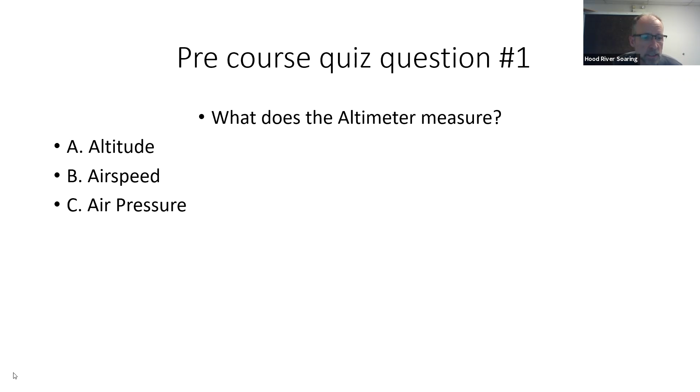Let's see, the next one is: which statement is true? I'll go ahead and activate that question. So you should see pre-test question 2 pop up on your Slido app now, and you can select A, B, or C. Which statement is true? This is regarding the atmosphere. A: Pressure increases with altitude and temperature decreases. B: Pressure and temperature both increase with altitude. Or C: Pressure and temperature both decrease with altitude. So as you are increasing in altitude, what is the pressure and temperature relationship, and how does that follow as you are increasing your altitude?

Looks like we've got 4 answers so far, and everybody's answered C, which is good. That's good. I don't know if we're going to get the fifth one in yet, but that's good.

So yes, pressure and temperature both decrease with altitude. If you think about when you went up on the jet up to 30,000 feet, it's really cold out there. Obviously you see that, and the only clouds or only moisture out there is frozen. And then the pressure also decreases, and we'll go into that, and I'll tell you why that's true.

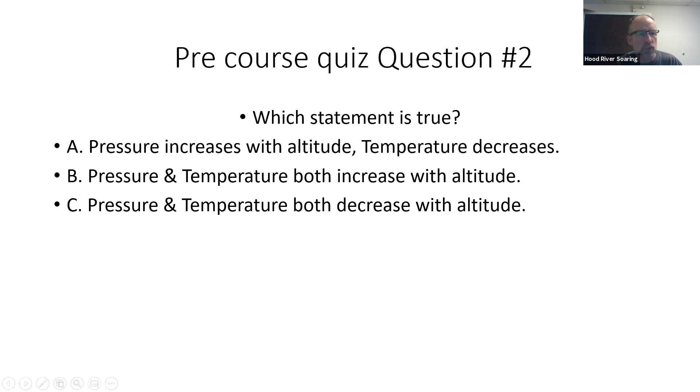Illustrate that as well. All right, so this is where I identify what the pressure instruments are. There are typically 3 pressure instruments in a glider or an airplane. They all have altimeters, and the altimeter gives you altitude. Remember, it's measuring pressure, but from that pressure it's giving you an altitude value, and it tells you how high we are. We want to reference the altimeter to know how high we are. It's especially important in a glider to know how high you are, because that's the only energy that you really have in a glider. You don't have an engine to go higher. The only way that you have energy to go anywhere is with that altitude. And to determine how far you can go, you need to know what the altitude is.

That's fuel in the tank in a glider is altitude. Next up on pressure instruments is the Airspeed Indicator, which tells us how fast we are going. We'll go into a little more depth on that, but they are important. Notice the altimeter is important because it tells us how far we can go within a glider, and also whether we can clear any terrain that we need to. But the airspeed indicator is important to know how fast you're going, because you need to have your airspeed.

Anybody who's flown already knows how important it is to have your approach speed correct. If you're flying too fast, you're going to float and use a lot more runway. If you're going too slow, the glider could stall. Very, very important instrument - in many gliders, that is a no-go item. If the airspeed indicator does not work, you cannot fly it. You can fly without an altimeter, but very seldom will you have an aircraft like this that you can fly without an operational airspeed indicator.

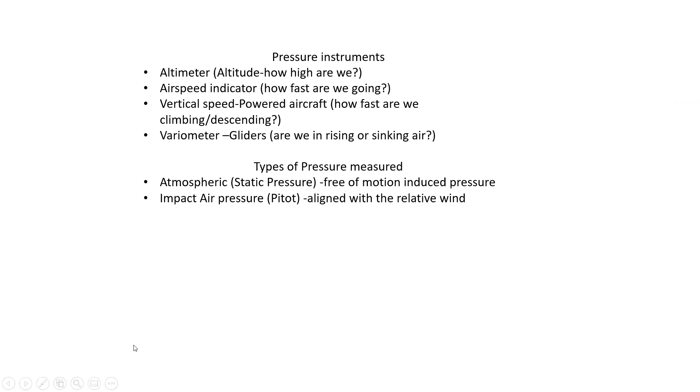Is atmospheric pressure the same as barometric pressure? Yes, that's pretty much true. I think we look at it as atmospheric pressure in an aircraft because you're moving through the air mass, whereas typically barometric pressure is what most of us on the ground think about, the barometric pressure at this point on the ground. But yes, it is the same thing.

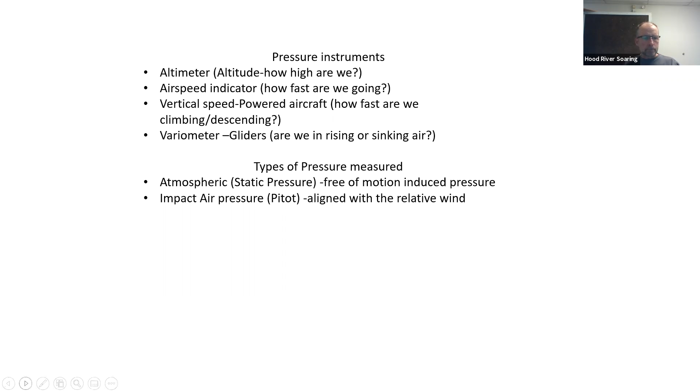This is a diagram of a typical pressure instrument system with the basic instruments: the altimeter, and the vertical speed or variometer, which references static air pressure outside the glider in a different way than the airspeed sensor does, but still references static air pressure. If you look over here on the side, these are the static ports. It shows two here; there aren't always two on an aircraft, sometimes only one, but often there are two. The altimeter, the vertical speed, and the airspeed indicator all reference static pressure. They all need that static pressure to work properly.

Now, the airspeed indicator also requires a second input, the pressure system from the pitot tube. The pitot tube faces forward. If you look at the K-21, I think pretty much everybody has flown so far. At the very nose there's that tube sticking forward, that's the pitot tube, and that's where it collects incoming pressure to determine airspeed. The thing to remember for questions is that if something happens with the static system, it affects all of these instruments, but if something happens with the pitot tube, it only affects the airspeed indicator.

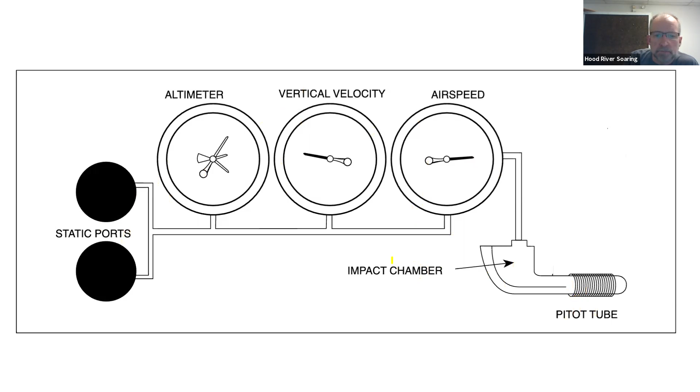We'll skip forward here, next frame. All right, so this illustrates the atmosphere. Down here at the bottom would be the ground, sea level, and all the way up top is 164,000 feet, that's rarefied air, way up in the atmosphere. One thing we as humans don't think of is that air has weight or mass, since we were born and live most of our lives near sea level. When we think of air, we think of nothing, but that is not true.

Air weighs 0.08 pounds per cubic foot. So in a normal bedroom, there's 50 pounds of air. You don't know it, you don't feel it, because we're used to it, much like a fish at the bottom of the ocean doesn't probably perceive that the water exists, it's always been there. You can't see it, but it's certainly there.

Now, where air pressure and the mass of the air becomes evident to us is when there's motion or movement involved. Like if you're going down the road and you roll down the window in the car and stick your hand out, now you're feeling the mass, you're feeling that air. So now we can feel it, still can't see it, but we can feel it. It's the same thing when the wind's blowing, the mass of the atmosphere becomes evident. Any questions so far?

So what we see is that the atmosphere goes all the way up to some 164,000 feet. At some point you're going to be into space, but the weight of the atmosphere is much more. That barometric pressure, atmospheric pressure, is highest down here because we have all of this mass of air, this column of air weighing down on us. That's why the pressure is highest here.

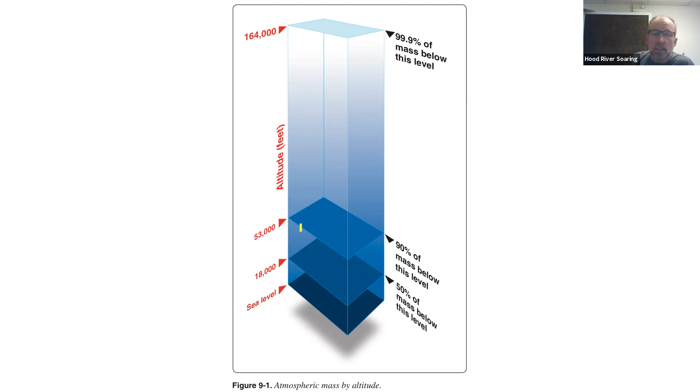Now, as we move up through the atmosphere, you can see that there's less air mass. There are fewer air molecules above us, so that weight is less, that pressure is less. And as we go further up, less pressure. So that's the principle the altimeter works on: sensing the difference in air pressure and inferring from that pressure, or lack of pressure, as you go up, what altitude you are at. Is that clear for everybody?

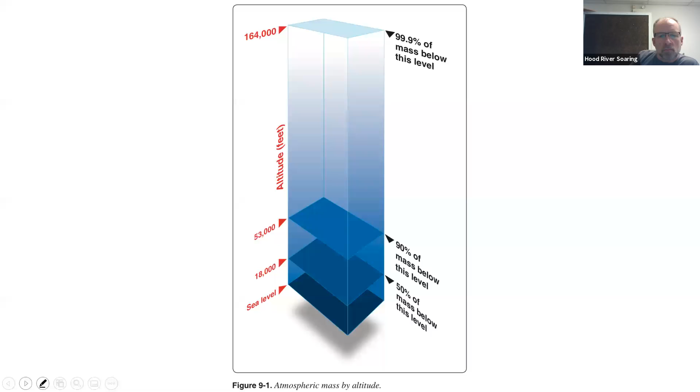Any questions about that? Okay, next up, next question, next one. Okay, so here we go.

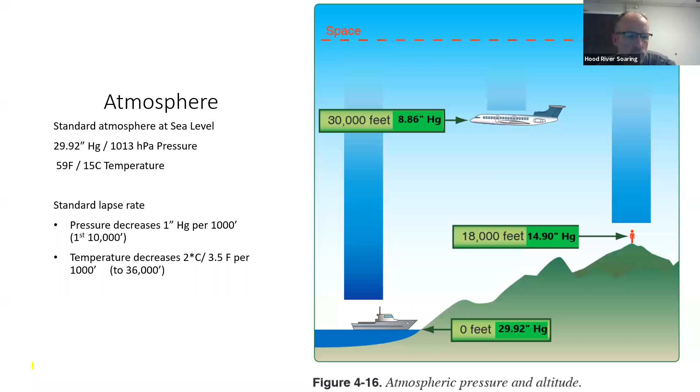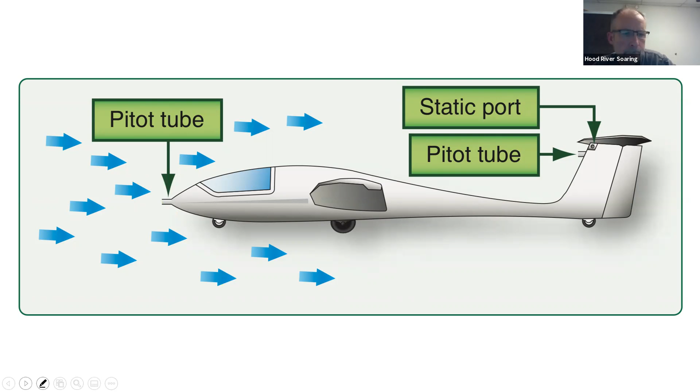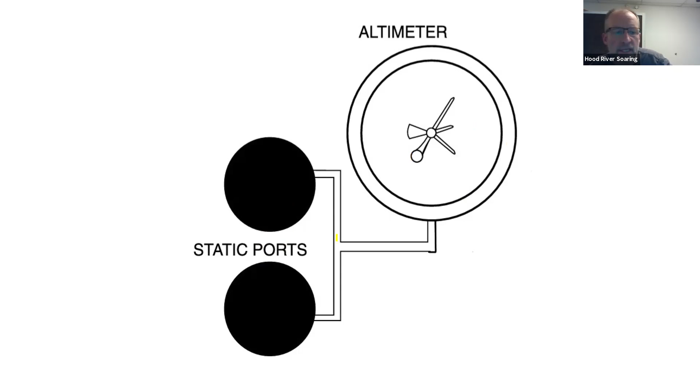Okay, so here's the diagram for the altimeter, broken down by itself. The first instrument we're going to talk about is the altimeter, and it goes out to your static system, out the static ports. That's all the altimeter reads, is this static pressure on the side of the aircraft. And that's how that works.

All right, so here's an illustration of the face of an altimeter. Does anyone have any problems reading an altimeter? We're going to go over that anyway, I just want to see if anybody does. Pipe up and let me know. It's not something you're naturally born with.

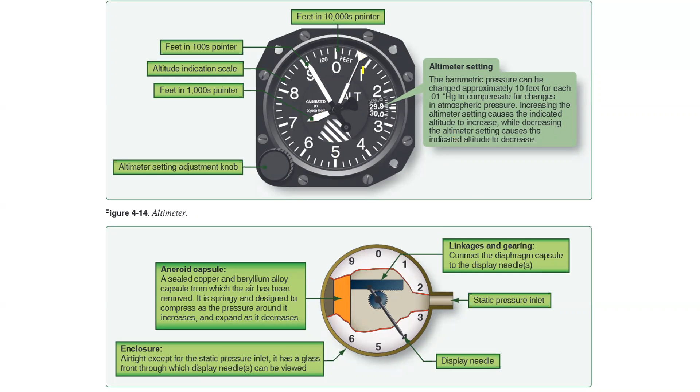On this, many altimeters look differently. Some of them don't have a 10,000 foot marker. There might be a little window here that rolls over as you go through the 10,000 foot mark and you start counting up again. So this is a generic one, but yeah, that's just part of the needle, so it has no other bearing.

Any other questions about this? Does anybody have a question about how this pressure increasing or decreasing would make the needle go up or down? Or why the pressure is increasing or decreasing inside it? Any questions about that? Okay.

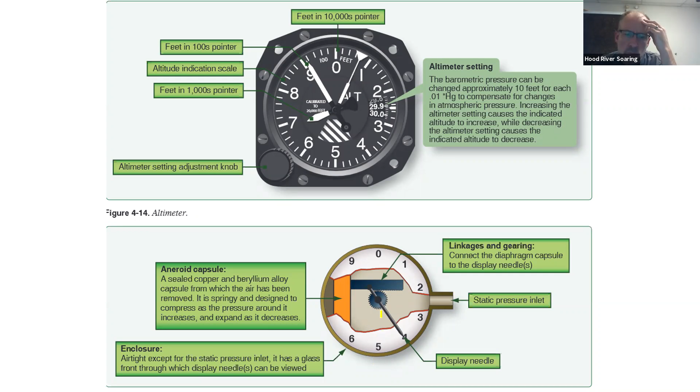So while they're taking a look at that, prior to takeoff, the altimeter should be set to the current altimeter setting. You'd get that from a tower or weather report, and those of you who've been at Hood River, there's a frequency there for AWOS, and it will tell you what the current altimeter setting is. You can dial that in right here.

Now you may have noticed we don't really do that with the glider. We know what the altitude is at the field. We know it's 638 feet. We usually dial that in for 600 feet. So if you know what elevation you are at on the airport, you can also do it that way. You could set the pressure in this from an official source for that time, and your altitude should indicate field elevation, or you can set field elevation, and then from that you can tell what the local altimeter setting is. So it works both ways, either way.

If the altimeter setting is not available, the altimeter should be set to the elevation of the departure airport. One thing to think about there is that airports are not all totally level, so if you're really looking for an accurate altitude setting, you need to know what the altitude is on each end of the runway. It might be 30 or 40 feet different at different points in the airport. It's less critical on a glider when you're flying VFR, because you really need to be looking out the window and determining your altitude by visually assessing it and understanding it.

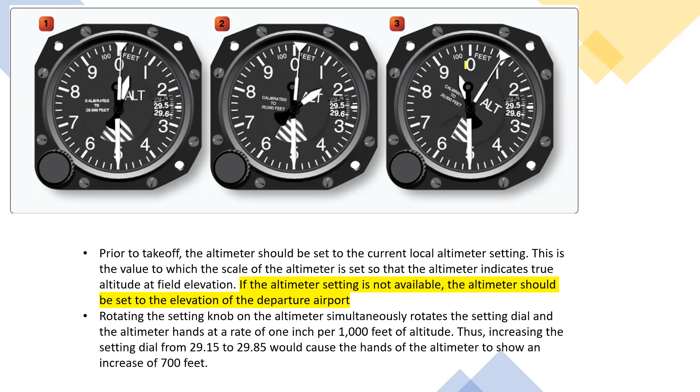Okay, cool, good. This is something that with practice you'll just glance at it and know, but it takes a little while to get your head wrapped around it. That's why we're having class - to figure these things out. Does anybody have any other questions about what these altimeters are reading, or any confusion about anything we've covered so far?

The black and white stripes down here at the bottom - you know what, I don't know what those mean. I'm not sure what those are, but we can find out, we can look it up. I will look that up, because preparing this class, I've learned a few things that I didn't know or didn't know very well.

As you progress through your aviation career, you're going to be constantly learning. That's really the cool thing about flying for me - I love learning new things, and things that are a little complicated. So we're all going to be learning in this ground school course, including your instructor. And one thing I've learned is I'm not going to try to tell you I know something I don't know - I'm going to admit it. I just don't know, so I'll look that up and get back to you. It was Vince that asked that. All right, so, okay.

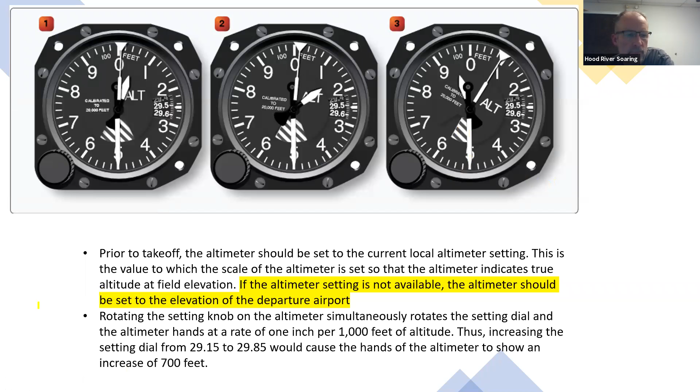Let's see, we're going to move up to the next frame here. I can get it to move. Okay, so different types of altitude.

When we put this ground school together, there was some question - people were interested to know what different acronyms meant in aviation. That's something we, having been flying for a long time, have picked up on and learn as we go, without thinking about it too much. But somebody just coming into it is overwhelmed by all these terms and acronyms. So we're going to make a concerted effort to focus on terms and acronyms associated with aviation - items you'll want to commit to memory.

So these are different types of altitude. Indicated altitude is the altitude you read off the altimeter - you look at the altimeter and that number is indicated altitude. Flying along, air traffic control or a tower might ask what your altitude is, and you're going to report back your indicated altitude. That's what you're going to tell them.

Next up is absolute altitude. Absolute altitude is your height above the surface, above the terrain. So if your altimeter shows that you're at 10,000 feet, but you're over Hood River, which is 600 feet, then your absolute altitude is 9,400 feet. That's your altitude above the ground.

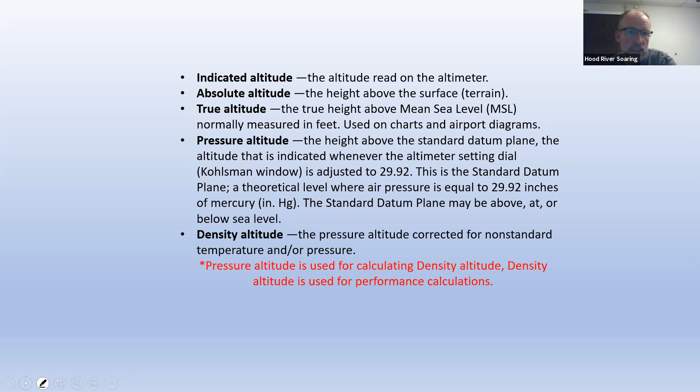They're used - pressure altitude is used for calculating density altitude, and density altitude is used for performance calculations. So these are only ever used for figuring out the performance of the aircraft you are flying. I've got some additional slides here that hopefully will illustrate this a little better. Does anybody have any questions so far? Please let me know if you do.

Okay, so here's our airplane flying along, and this is its absolute altitude. Once again, absolute altitude is your altitude above the terrain. Then your true altitude is your altitude above sea level. And your pressure altitude is your altitude above this standard datum plane. The reason this is important is that we need a basis for making those performance calculations - that's where manufacturers and engineers use this standard datum plane as a benchmark to determine the performance of the airplane.

You're flying along, and you're actually flying - these are the important ones - true altitude, which is expressed as MSL, mean sea level, altitude above sea level. That's what you will have on your altimeter if it's set to the correct altimeter setting, which you would get from weather reports.

Absolute altitude, once again, that's not shown on the altimeter. The altimeter does not know how high you are above terrain. There are other instruments that may tell you how high you are above terrain - usually those involve radar, or they might involve GPS, because GPS can determine your altitude and can also determine the elevation of the terrain below you. It could possibly give you an absolute altitude indication, but the altimeter is never going to tell you your height above terrain. That's something you've got to work out based on your charts, knowing how high the terrain is, and then how high you are flying.

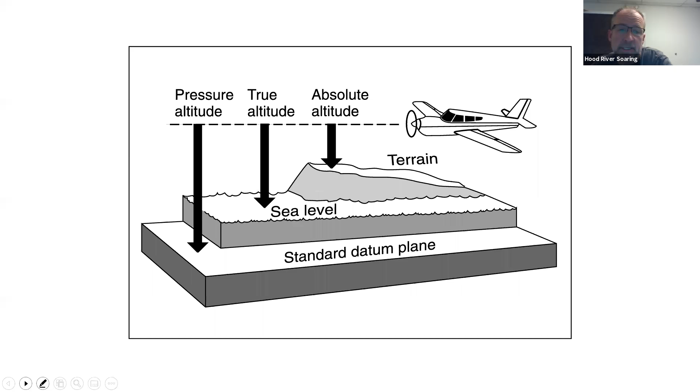So let's see here. The last thing we need to discuss that's important for you to know when going through your practical test—there are questions that ask about this. Fortunately, none require math or an absolute number, but they will ask you to understand the concept. So this is the concept.

When I first started learning to fly and taking ground school a long time ago, I remember this one rhyme that pilots use to remember something important: from high to low, look out below; from low to high, you're in the sky. It's a little rhyme that helps us remember this principle.

It can be a little difficult to wrap your head around, but I'll give you the best information I can. When you're flying between areas of non-standard pressure—29.92 is standard, but that doesn't really exist, especially across a wide area. If you're flying a long distance, or in the air for a while, like in a glider for 3 or 4 hours on the ridge, the pressure could change as you're coming back. Fortunately, we can adjust that—call in or dial up on the radio to find out what the AWOS says the pressure is, and get our altimeter corrected as pressure changes.

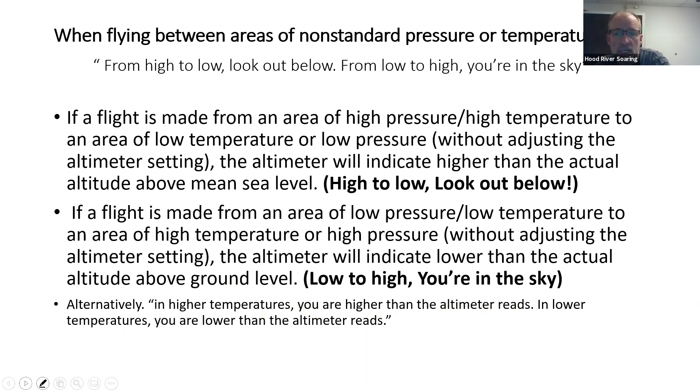I've got a couple illustrations here that line this out to illustrate a little bit better. So here is 15 degrees Celsius, 59 degrees Fahrenheit.

Let's see, how about... Vinny, unmute your mic here real quick, I got a question for you. You with me? Yeah, sorry, I just got a movie in the background. Okay, great, cool.

So Vinny, right here in the middle of this little illustration, we have over here, it's 30 degrees Celsius, which is 86 degrees Fahrenheit. That's pretty hot. And down here on the other end, we've got 0 degrees Celsius or 32 degrees Fahrenheit. That's the freezing level, pretty cold.

What about this one here? What are you reading for temperatures, right down at the bottom? What am I reading for temperature? It's right on there, it's 15 degrees Celsius and 59 degrees Fahrenheit.

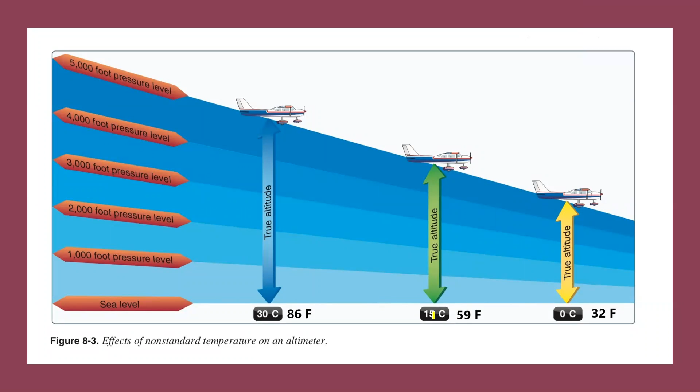Okay, alright, and we just talked about that here a little earlier, I said we needed to commit that to memory. What is that temperature? What can you tell me about that temperature? That's standard temperature? Bingo, that's right, that is a standard temperature. And at standard temperatures, your altitude, there's no variation.

So the true altitude, your indicated altitude and true altitude are correct. So if your altimeter is reading 5,000 feet, you are at 5,000 feet when the temperature is standard. Does it make sense? Yep, makes sense.

All we're talking about right now is just variations as far as the temperature, because that's what we're talking about, is high to low, look out below, we're looking at that as a perspective. So at standard temperatures, it's right. Now look back here, it's much hotter, it's warmer. Warm air expands, it's expanding, it's spreading out. And what you see is that these pressure levels are also spreading out, right?

So back here, we're showing we're at the 5,000 foot pressure level. So the altimeter sees a pressure that it interprets as being 5,000 feet, but we're not at 5,000 feet. We're well above it, we're up here, maybe it's 6,000 feet. So colder... higher temperatures, you're higher than your altimeter is indicating. Low to high, you're in the sky, you're high.

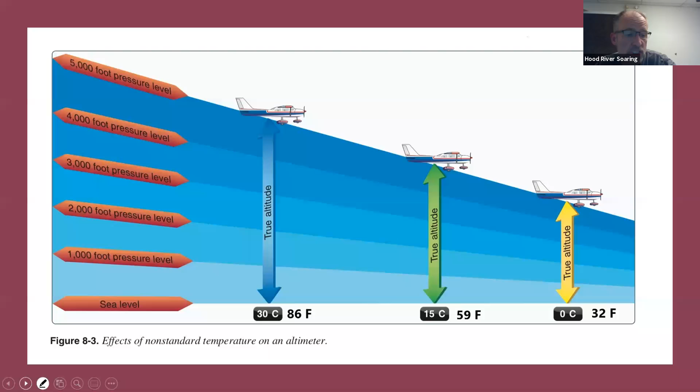In that, there is a chart that you can use for calculating the difference. And it's only shown for cold temperatures because that's where it's most critical, right? You're too low, you're lower than what you think you are, and that's where you could run into a real concern. And I do have that chart here, we can pop it up. I believe it's the next frame.

Okay, well here's another one that kind of also illustrates it. Your reported altitude, let's say this is 5,000 feet here. If you're in higher temperatures, you're actually up here, higher than what your altimeter says, which is less of an issue than it is when you get to a cold temperature and you're below what your altimeter indicates. So what we've discussed here are ways that the altimeter could be inaccurate, which is important for you to understand, those ways that an altimeter might not be telling you what you think it's telling you.

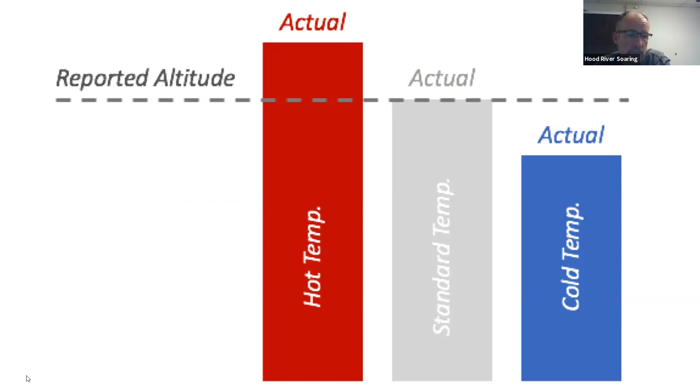Flip through to the center of the page. This shows the table where you can determine the difference, the error, based on temperatures. I'm not going to go into a lot of detail on this. This is something I just learned a lot more about trying to represent, because I had some real questions about this.

You're not going to have to reference any of this for your private pilot glider written exam, but this is where that information comes from. Here, a temperature of -10 degrees Celsius, and the aircraft altitude is 1,000 feet. We have -10 in this column, and the aircraft altitude is at 1,000 feet. We can see that your altimeter is showing 1,000, that's your indicated altitude, but the error is 100 feet below that. So the altimeter setting may place the aircraft as much as 100 feet below the altitude indicated. That's the scale of error we're talking about.

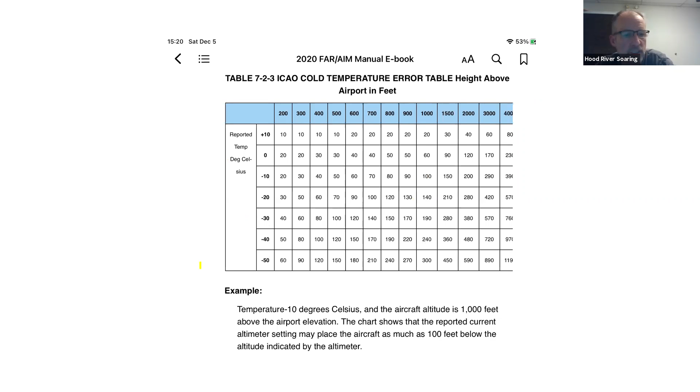Maybe not a deal breaker. Closer to the ground, it's less of an issue. At higher altitudes, it's more pronounced, but you do need to know: high to low, look out below; low to high, you're in the sky. Commit that to memory, you're going to need that to answer some questions on the written exam. And I think that pretty much covers altimeters.

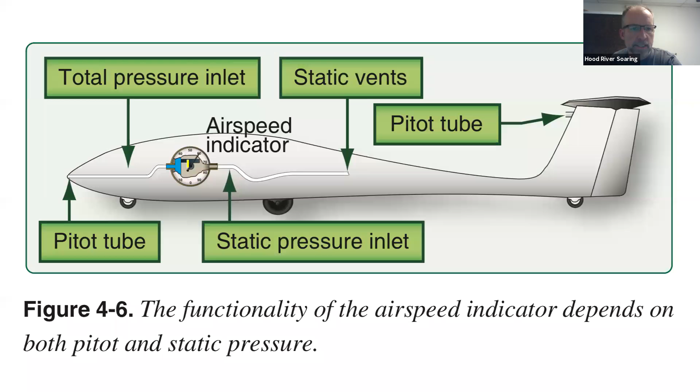Pitot tube up front, airspeed indicator, we've got our static pressure line going towards the back. Let's skip forward real quick and go into that. So here is an airspeed indicator. This is your airspeed indicator.

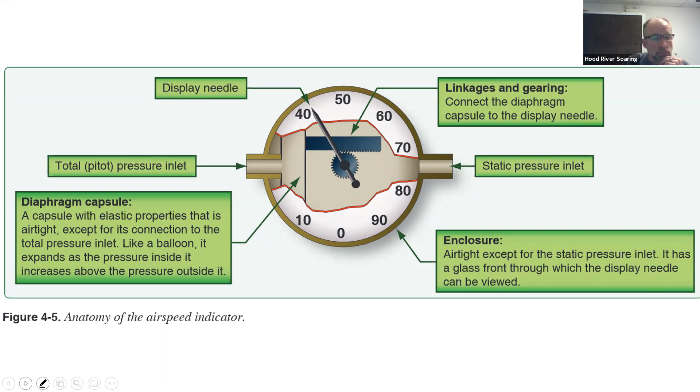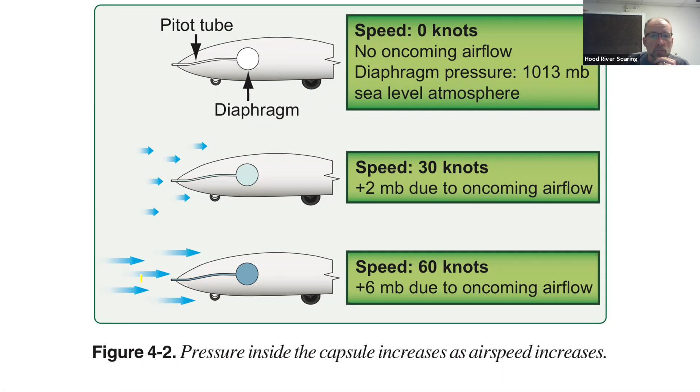Okay. It really is. They're really pretty simple systems. They work very well, except when there is a problem.

And that's this here. Here we're going into the section about problems. What are the potential faults? The potential faults in a pitot-static system are if they are restricted or plugged. There the pressure can no longer travel, or the air molecules can no longer travel in or out through those ports to the instrument. And that would be caused by dirt or debris in the lines or at the ports.

That's why we cover up a lot of these instruments, like the pitot tube. We're going to cover it up when we're not using it so that an insect doesn't crawl in there, or dirt and mud might go in there when we're not flying. So we inspect those when we're doing our pre-flight inspection. Insects could also possibly block that.

And here's the big one: ice. Not so much on gliders because we're not going to be flying in known icing. But one thing you could get, now that we're doing winter operations, ice could form over these ports while it's parked. So it's very important to make sure there's no ice restricting or blocking that.

Other possible faults, although less common, would be leaks in the system, and those would be possibly a line that's loose, or maybe a line has a pinhole leak in it, or something like that. Very uncommon. It could happen after it's been repaired. Maybe someone, the mechanic, is supposed to test that stuff, but that's someplace which you need to be especially conscious of problems: after maintenance.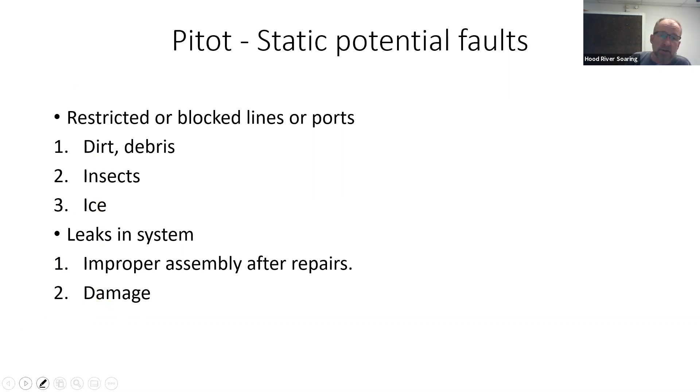Okay, so these are your faults. These are problems that could happen with an airspeed indicator. And you have your airspeed indicator right here. In this situation, the blockage has occurred at the pitot tube, possibly ice. Maybe it's gotten plugged with something, and you no longer have that ram air pressure entering it.

Now there's a drain hole here, so it does have essentially, it's less like a static port. So you basically have static pressure on both sides of this airspeed indicator, and you're showing 0, just like as if it were sitting on the runway and not moving.

This is probably, of all the problems you could have, airspeed is a really critical instrument to have, and you need to know it, but if it's registering 0 and you're flying, you know that you're not flying 0. So this is a problem where you say, hey, I cannot trust this, so we're going to forget about referencing that, and we're going to use whatever other means to ensure that we're flying at the speeds that we need to get back on the ground.

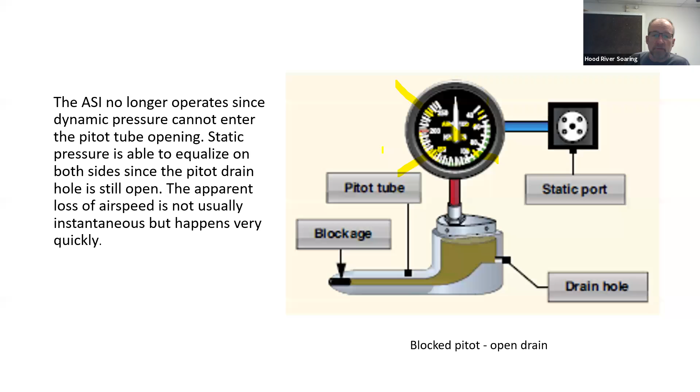So blockage here wouldn't affect any of the other instruments, but it will affect the airspeed indicator, and it would get a 0 indication on that. Here is another possible fault, and in this one, the system is blocked at the pitot tube and at the drain hole.

So both of them are frozen over, and you've got no air pressure change here. What will happen is that your airspeed indicator will freeze at whatever your airspeed was when this occurred. I've had this happen on a simulator that encountered icing. It was pretty interesting - the airspeed indicator stayed the same. But in my situation, the static port also froze.

It really wasn't changed at all, and I didn't know there was a problem until it had progressed significantly. The problem is that this trapped air means your airspeed indicator stops at the airspeed you're flying at, but now it starts acting like an altimeter - it goes up when you climb, and shows a lower airspeed when you're diving.

Anybody who has been flying knows that when you're diving, typically airspeed increases, and when you're climbing, your airspeed would decrease. It's doing the opposite. Pilots have actually died from this. In instrument conditions or at night, they interpret this wrong and don't know it's frozen up. So they might start descending, the airspeed drops, and they think 'oh my goodness, I need to lower the nose to keep the airspeed up.' They push the nose further forward, it continues to drop, and they end up crashing. An instrument that's reading incorrectly is definitely much more dangerous than one that has just stopped working, because when it stops working, you know there's a problem and you disregard it.

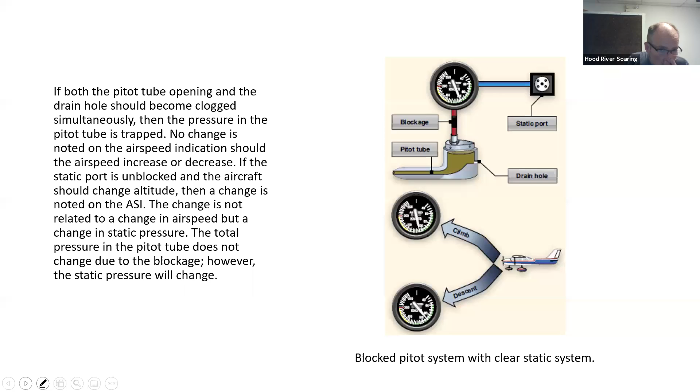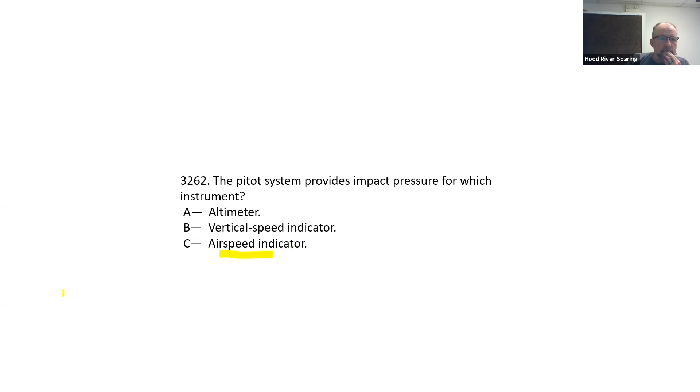Great, everybody got that one right. Fantastic, airspeed indicator, Pitot system. Excellent, and these are actual questions. So if you're going to take the written exam, these are the ones you may see on the exam.

I'm sort of noticing a pattern of C. Yeah, I know, I did too. So I guess if you're taking the test and you don't know the answer, you can guess with C. I would suggest knowing the answer, but yeah, you're right. C, I've read that somewhere. C is the popular choice. I don't know why that is. I think they figure that out.

3247 should be up on your screen and in Slido. If the Pitot tube and outside static vents become clogged, which instruments would be affected? We have 3 answers in so far. Got all 5, everybody got that one right. Excellent, that's right. These are your pressure instruments.

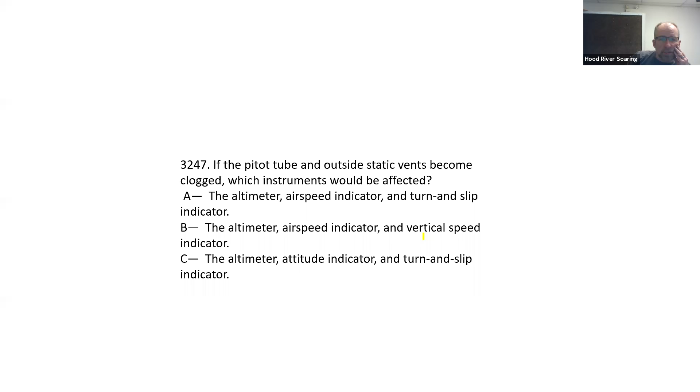All right, next one up. Let me activate that. Here we go. Which V speed represents maneuvering speed? So it looks like we've got some confusion, let's go over this a little bit. VA can be a little difficult. I don't know what it stands for necessarily, but that is maneuvering speed.

But these two are pretty easy to eliminate. VLO is landing gear operation, and VNE is velocity never exceed, remember that's your red radial line. So that leaves VA. VA is maneuvering speed.

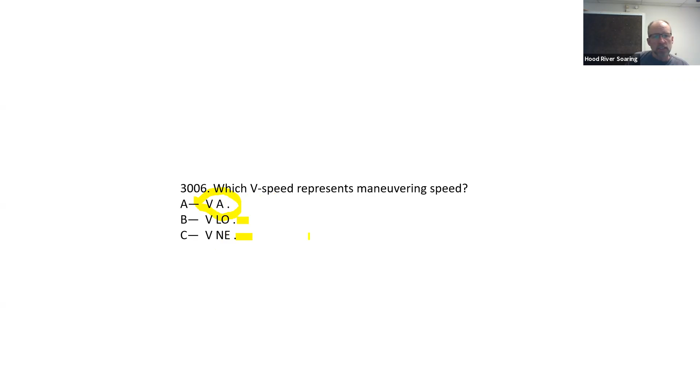These V speeds are something that takes a while. You're going to want to get a list, go over them, review them, and then you're going to learn them, and you're going to know them when it comes time to take your test. Or if you're talking to the examiner when you take your practical exam, you're going to need to know this stuff. He will ask you these questions, or may ask you.

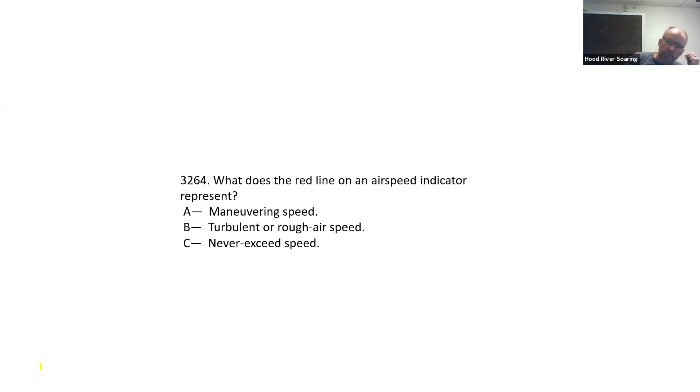So 3264 is next. Looks like we've already got one answer in here. What does the red line on an airspeed indicator represent? We got 4 or 5 answers, everybody got that one right. Velocity never exceed, very important speed to know.

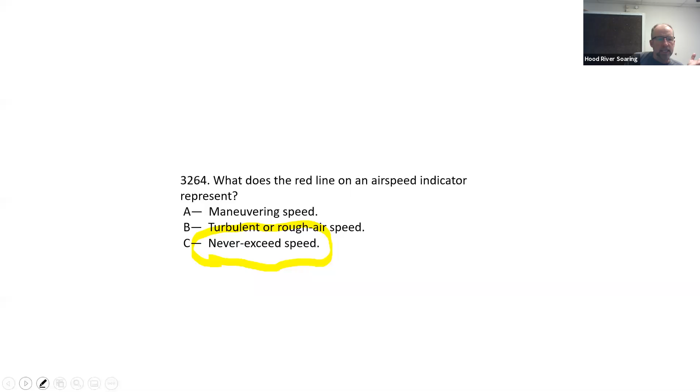And what is that one called? It's called VNE, velocity never exceed. All right, here we go. 3268, which color identifies the never exceed speed? Darn it, gave this one away on the last one. All right, everybody got that one. All right, good deal.

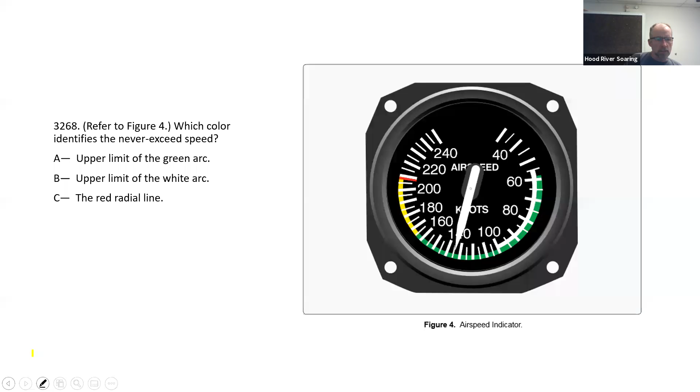3007, here we go, another V speed. Which V speed represents maximum flap extended speed? All right, everybody got that one, good deal. All right, moving along. VFE, velocity flap extension.

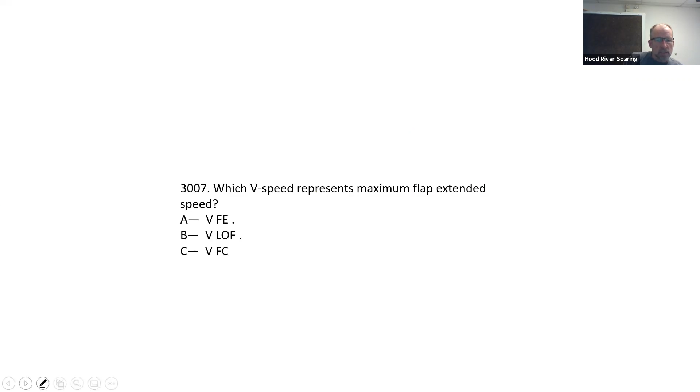All right, 3008 is next, it's live. Which V speed represents maximum landing gear extended speed? Landing gear extended speed.

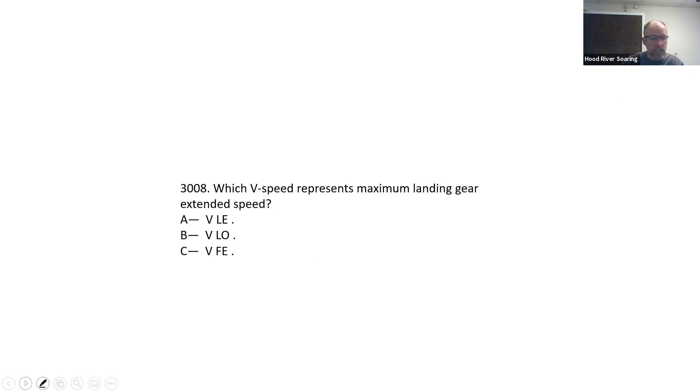Skip forward to the next, 3009 is our question. VNO. VNO is defined as the normal operating range, that is correct. Next up,

3010, and that question's live. VSO is defined as: A, stalling speed or minimum steady flight speed in the landing configuration; or B, stalling speed or minimum steady flight speed in a specified configuration; or C, stalling speed or minimum takeoff safety speed.

Okay, looks like we got all the answers in, and we got some splits on this one. I don't know if you guys are changing your minds or thinking about it.

VSO is stalling speed or minimum steady flight speed in the landing configuration, with your flaps extended. You are coming into land at VSO, that's the lowest speed, the bottom of the white arc. VS1 is stalling speed or minimum steady flight speed in a specified configuration, with your flaps retracted and landing gear retracted - that's your stall speed clean.

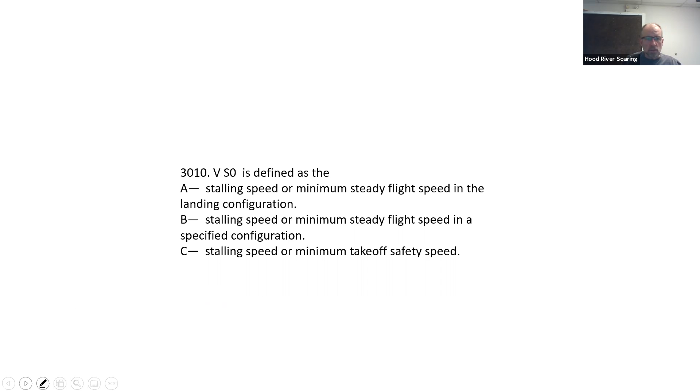All right, 3266 is coming up next, and that question's live. What is the caution range of the airplane in this airspeed? What's the caution range for this airspeed indicator?

All right, everybody got that one right. 165 right here to 208 knots. That is correct, that is the caution range.

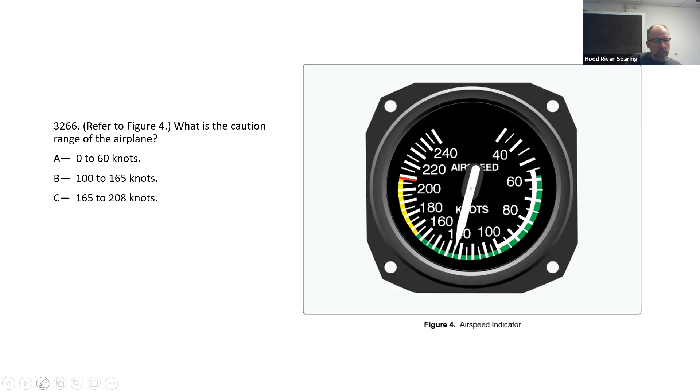Next question, 3106. Prior to takeoff, the altimeter should be set to which altitude or altimeter setting? A, current local altimeter setting if available, or departure airport elevation. B, the corrected density altitude for the departure airport, or C, the corrected pressure altitude for the departure airport.

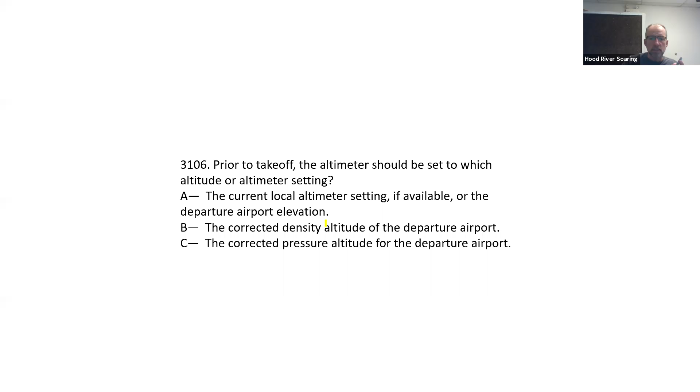Okay, looks like we've got all the answers in. So A is correct. Remember, we're going to set that for the current altimeter setting, which we would get from the AWOS on the radio, or a tower if you were at a towered airport, or from a weather report that shows the current local altimeter setting. Or if it's not available, the departure airport elevation - that's where you set when sitting on the runway, ready to go behind the tow plane. That's how we usually set it.

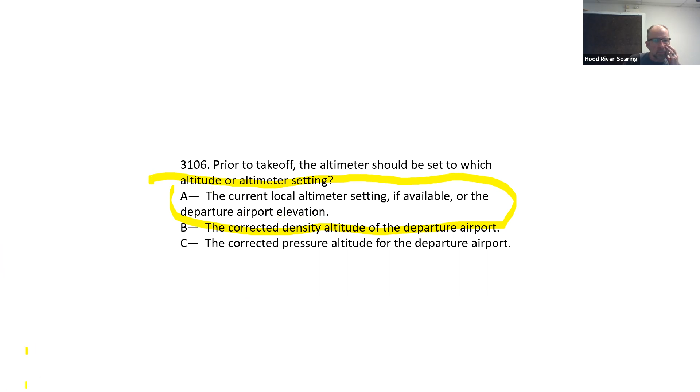So A is the correct answer on that one. All right, next up, 250 should be our next one. Okay, here we go. So here's your altimeters, and you can select - okay, so that question is active now. What does altimeter 1 indicate?

Okay, so next up, altimeter 2. Get that question up, 3251, that one should be live. Now we're looking for altimeter 2, what does altimeter 2 read?

I haven't seen that tiny arm before. What is that, the little one on this altimeter - this is a different style. This is the 10,000s, tens of thousands. The first one we looked at had a skinny one that went all the way out with the little reverse triangle on the end, but that's the 10,000 feet. You can see here it also says 10,000 on the inner one and 1,000s on this one - it kind of helps a little bit.

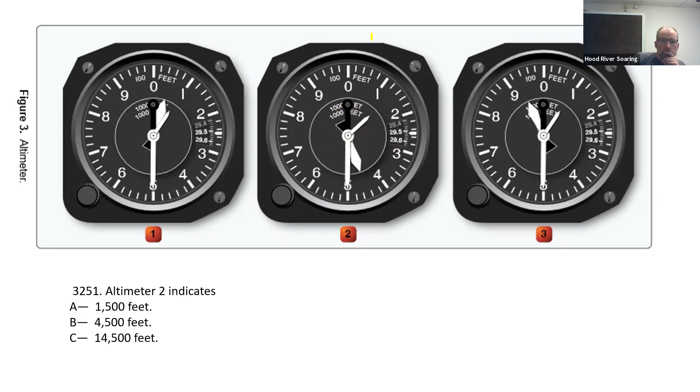Okay, all right, so yes, it's 14,500 feet is what this is indicating. This tells us we're above 10,000 feet because this is the tens, so we're above 10,000 feet, we know that. So it's got to be 10,000, and then here's 4, so 10 plus 4, 14,500 feet. All right, next up, 3253.

3253 is live. 3253, which altimeter indicates more than 10,000 feet? So one of these three indicates more than 10,000 feet.

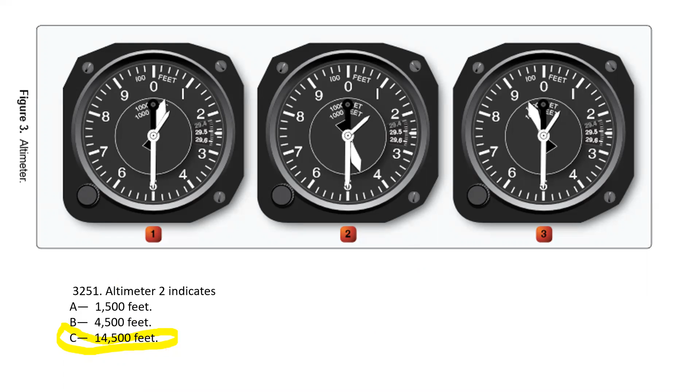You want back a slide? Go back a slide? Oh no, did I? Yeah, oh sorry about that. My mouse is getting a little twitchy here.

Which altimeters are indicating more than 10,000 feet? Okay, yeah, 1 and 2 is correct. I'm trying to get a little tricky here, but yes, you are. That one's 10,000, you're just a little over that 0, 10,500 on that one. This one here is 14,500.

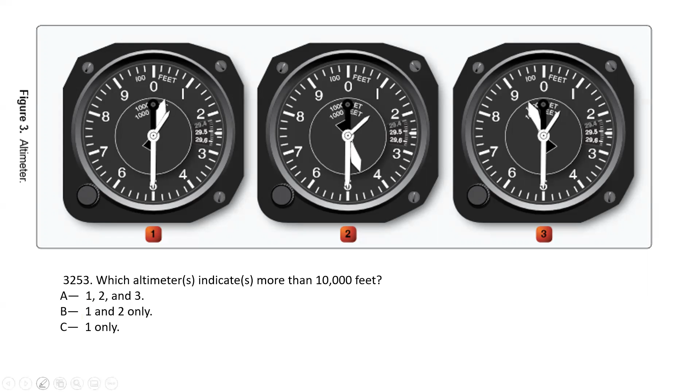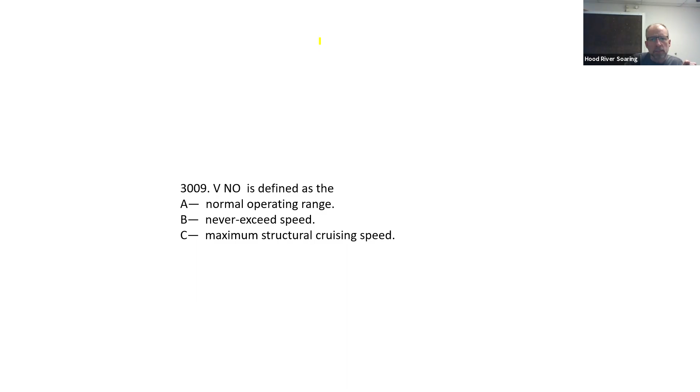I hope this information was helpful and that you learned something from it. If you see points in there that you have confusion about, I'd be happy to discuss it with you later — email me, everybody should have my email address. Go back to that section; everything we discussed should have been in that section of the glider flying handbook that was assigned. I don't know, we wanted to check that one question. I'll check that out and email everybody to let you know what the correct answer was. But I think you guys did pretty well overall.